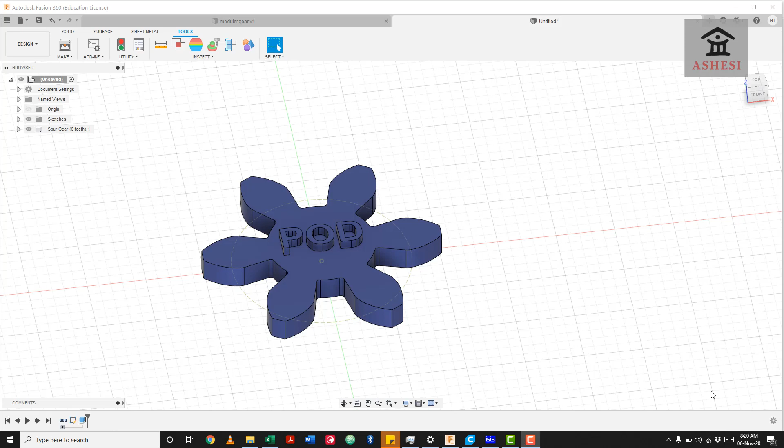Hi everyone, in this tutorial we are going to learn about 3D printing. Over the past few weeks we've been able to learn how to model different items, and then we've also learned how to create assemblies. In this final tutorial I'll show you how you can actually make it and use it for something useful. To help me do that, I'll show you how you can 3D print this spur gear with the Principles of Design logo embossed on it.

I'll be showing you how the 3D printer works, and then I'll also show you the various procedures you go through to prepare this model for 3D printing. Let's get to work.

Let us begin by understanding what 3D printing means. So a 3D printer is basically a machine that has three motors, and the three motors are able to move on the x-axis, y-axis, z-axis. And when it is doing that, it keeps adding a molten plastic material depending on the shape that you program it to print.

So take, for example, this spur gear with the logo on it. If we want to 3D print it, we'll start with a blank bed, and we'll start depositing material from the blank bed, and then it will keep rising up till it gets to this level.

So 3D printing is a type of manufacturing called additive manufacturing. Now the difference between additive and subtractive manufacturing is, with additive, you start adding till you are done with whatever you are manufacturing. But with subtractive, you have a piece of material, and then you take material away from the stock material till you are done manufacturing.

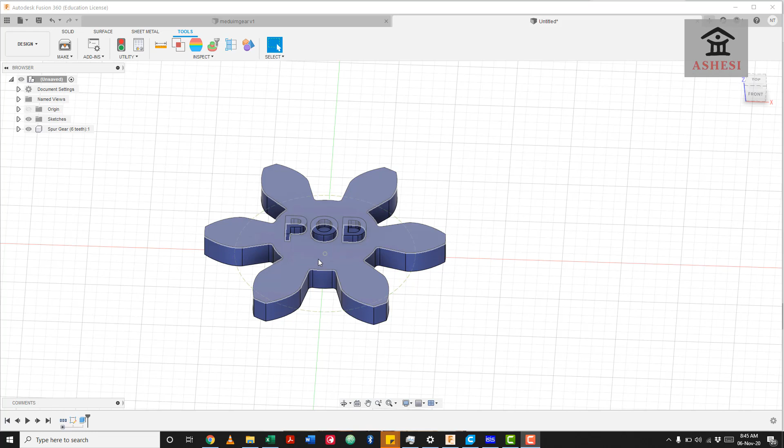So when we compare 3D printing with carving wood, you need a big piece of wood first before you cut some parts of it till you are done with the preferred shape of carving that you want. But with 3D printing, you start with a blank flat surface and you keep adding molten plastic material till you get this. There are various types of 3D printers on the market.

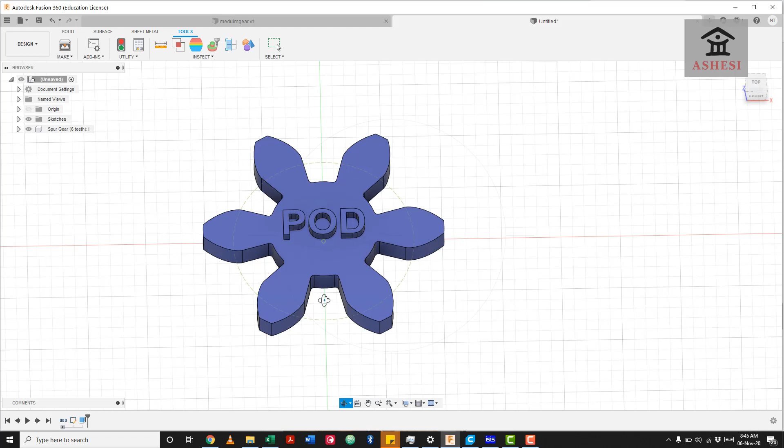Most of them depend on the brand or manufacturer that makes them. Very popular ones include the Prusa i3, we have the MakerBot, we have the Creality.

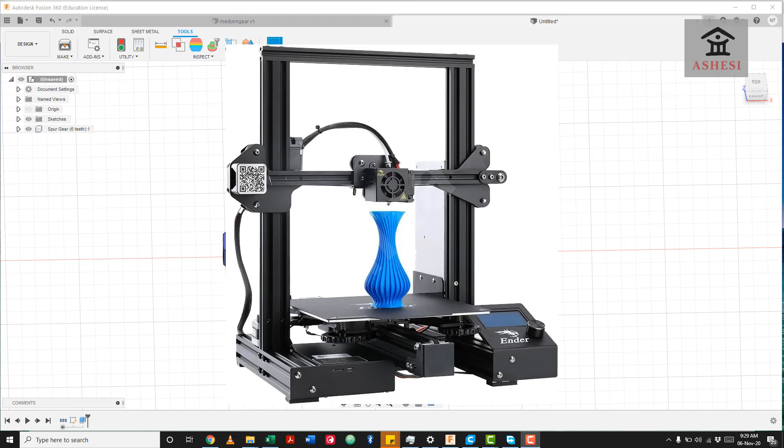Now, there are a whole lot of 3D printers on the market. Some of these include the Ultimaker, the MakerBot, the Prusa, Creality Ender, etc. The 3D printer I'll be using for this tutorial is the Creality Ender 3 Pro. It's a personal printer I use at home for making stuff.

Now, the 3D printer does not understand whatever you are doing in Fusion 360. The 3D printer only has three motors: the x-axis motor, y-axis motor, and the z-axis motor. So we need to prepare this model into a format that the 3D printer can understand, in the format, let's say, move left motor, move right motor, move Z motor.

To do that, we are going to click on Make, and then we select 3D Print. And then over here, you see a small dialog box opening up. You can change the refinement to how you want it. And then you need to select the body that you want to 3D print. So I've selected this body.

Now I can either choose to send it to software that will help me convert this to motor movements, some of which include Mesh Mixer, Cura, Preform, Print Studio, etc. Or I can export it to a format that I already know, and then I will open the software independently and do that. I choose the latter option.

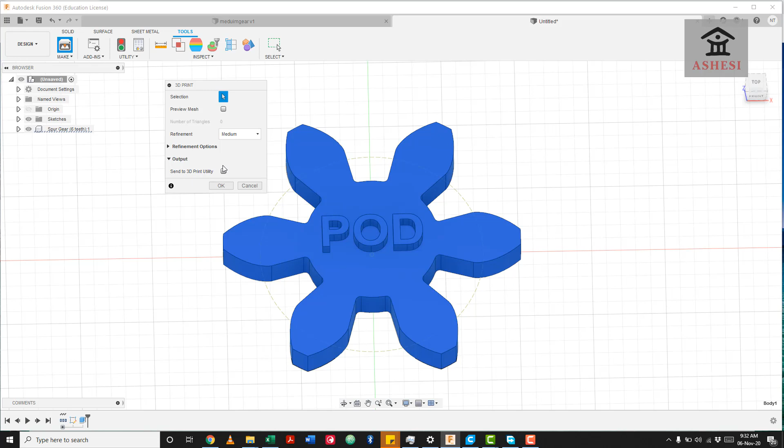So I will not send to the 3D print utility. I will untick this and then I'll press OK. When I do this, Fusion 360 will help me save this file into a format known as an STL file. So I'll change this to gear to print, and then I'll click on Save.

The next software I'll be using to convert this into motor movements is called Cura. And what Cura does is known as slicing. So it will take this model, convert it into XYZ motor movements, and that process is known as slicing.

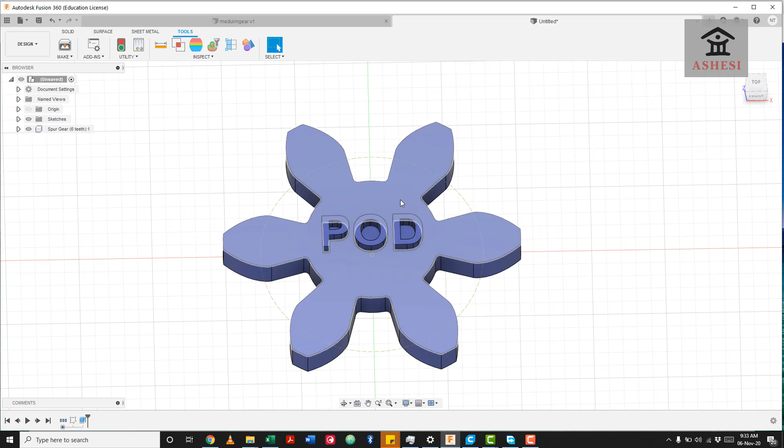So you can download Cura from the internet. Just search for Ultimaker Cura. Let me now show you the interface of Cura.

The first icon here is where you can click to open the file that you want to print. So I'll click on it and then I'll select gear to print. The next thing here is the printer that you are using. I have had other 3D printers before, but at the moment I am using Creality Ender 3 Pro.

And then the nozzle size is the size of the nozzle or the extruder that you are going to use. And the material that you are going to use, which is the filament, is called PLA. We have various types of filaments that you can use, like PLA, ABS, and various others. You can Google that and see.

And then the next thing here is where we can modify the print quality. So we can set the layer height of each print to these various values. It can range from 0.12 millimeters to 0.2 up to 0.28. I'll be using 0.2 for this printing.

And the infill, which I'll explain later, is how hollow or how solid the inside of your print should be. So when you take this model, inside can be hollow and the outside will look solid. You can change this to 100 if you want the material to be solid, or you can change it to something lower if you want the inside to be hollow. When it is solid, it is very durable but takes a longer time to print. And if it is hollow, it's not very strong, but it takes less time to print. So this adjustment is a trade-off between quality of print and the time it will take.

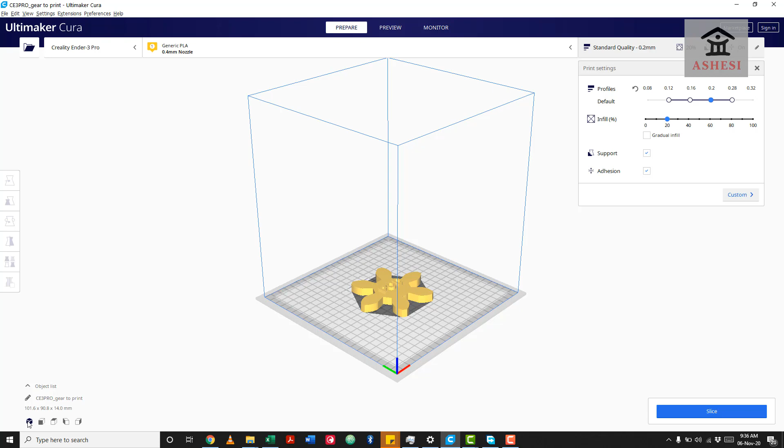So these are the settings I have chosen. Now, under here you have this option called the slice. The slice simply helps you to convert this to motor movements. And then you can navigate around the 3D interface of Cura using this. So this is kind of like the view cube of Cura.

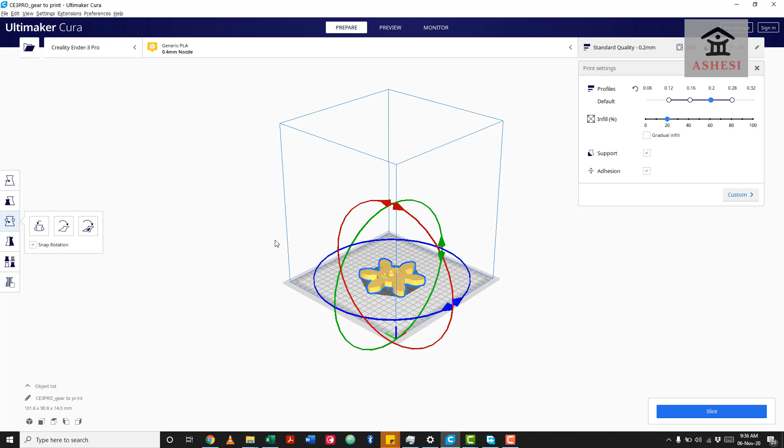The next options I have here can be used to modify the model. The first one here can be used to move the model in the various axes. The second one here can be used to scale the model if it is too big or too small. The third one here can be used to rotate the model. And then you can also mirror your model using this particular option. And you can also use this one to... I don't know.

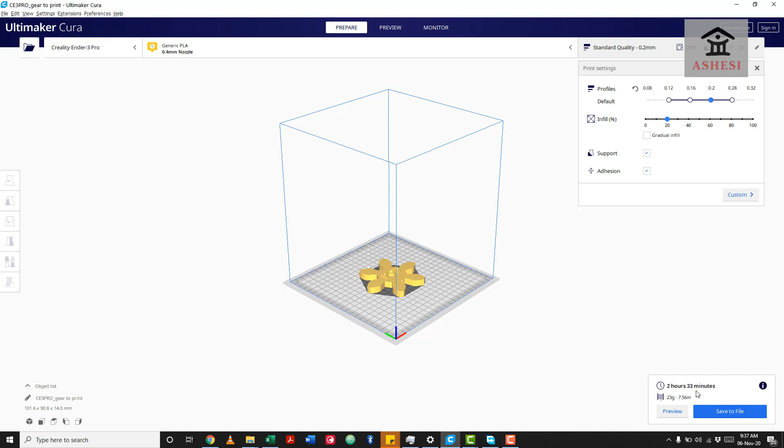All right, so I'm going to slice this. I'll click on the slice icon here. And then it tells me that it will take 2 hours, 33 minutes to print, which is too long for me. So what I'll do is scale this down to a smaller version to reduce the time it takes to print.

So I'll choose this guy, and then I'll change it to 60% of its current size. You notice that it becomes smaller, and the slice time changes. So I click on slice again, and I'll get 50 minutes of print time, which is quite good for me.

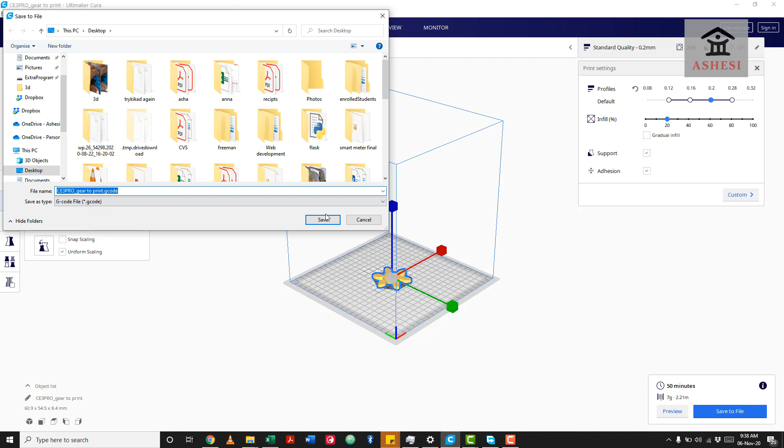So the next thing I'll do is take an SD card and slot it into my machine, then save the model to it. You notice that it generates something we call G-code. G-code is a standard for specifying motor movements in engineering. So I'll save it to my SD card, and then I can take it to the 3D printer.

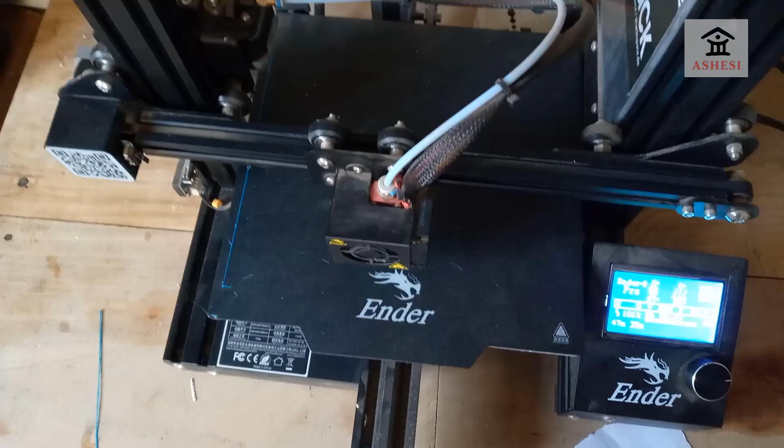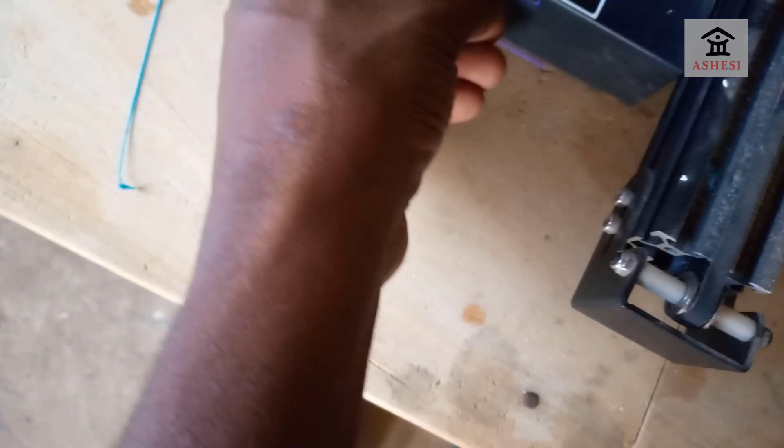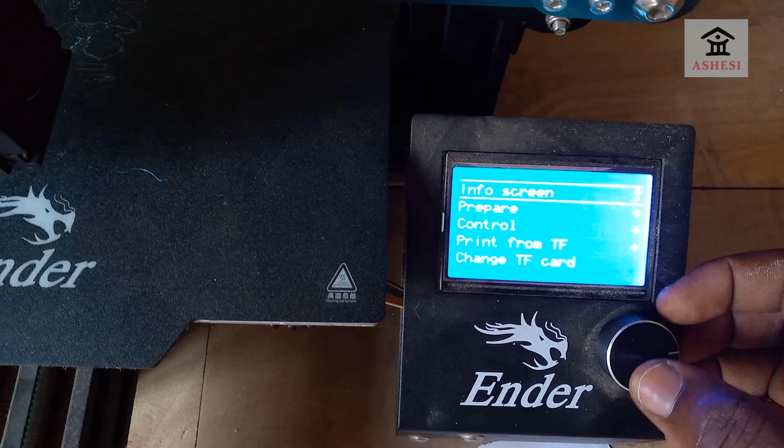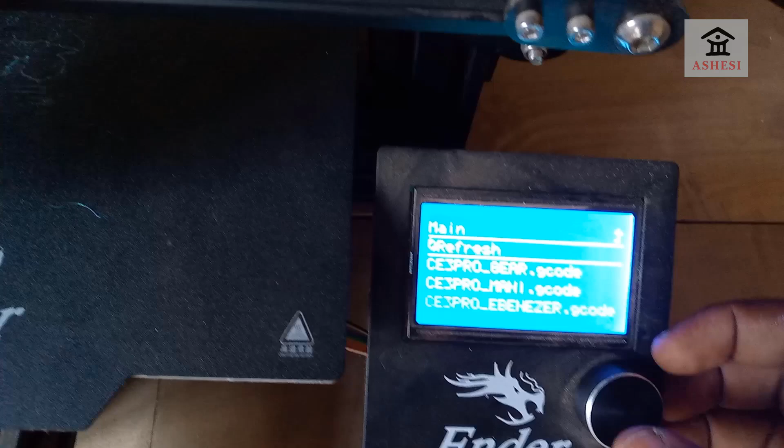The next thing I will do is take the SD card from my computer and insert it into the card slot of my 3D printer like this. After that, I'll go to the navigation panel over here, click on the rotary encoder here, and select print from TF. After that, I'll press refresh, and select the file that I have saved from my computer.

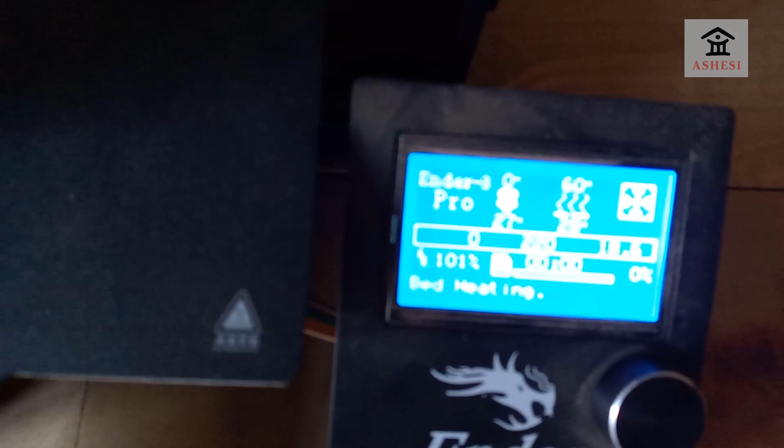We will need to wait for some time for the bed of the 3D printer to heat up, as well as the extruder. So whilst it is heating up, warming up, let me take my time to explain the various parts of the 3D printer.

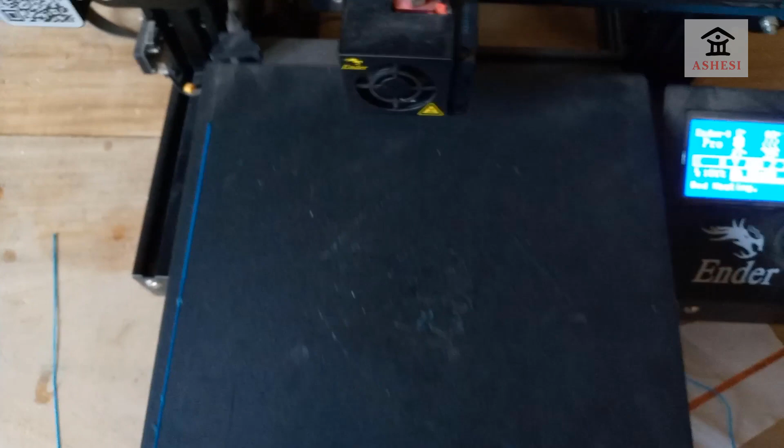The first part here is the bed. This is the bed. The bed is where whatever you want to print will be located. So this is the bed. The bed can move forward and backward, and the forward and backward movement is the y-axis.

The next part is the extruder. You notice there is some copper-like metal underneath. You are not able to see it.

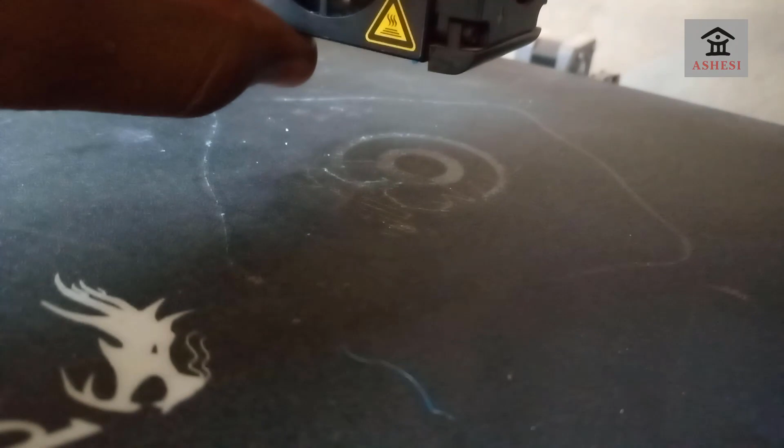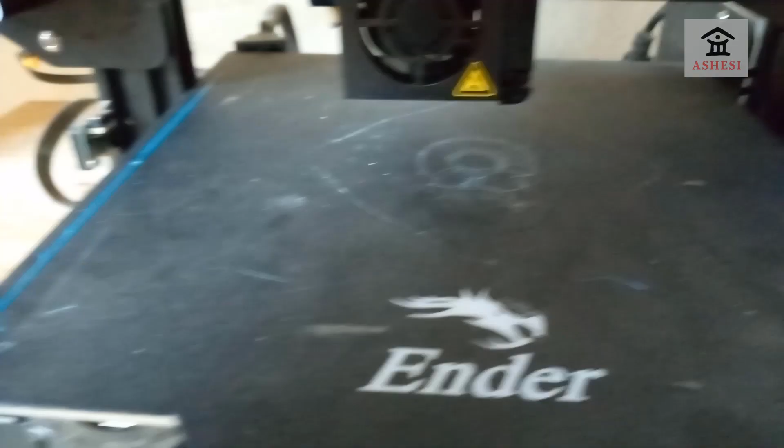This copper metal under the machine heats up to about 200 degrees Celsius. This plastic filament, which is on this spool, passes through here, and when it gets to the end of the extruder, it melts it and then deposits it whilst the machine is moving.

You'll see that shortly. Now, this 3D printer understands only motor movements. It has 3 motors, and those motors move the machine on the various axes.

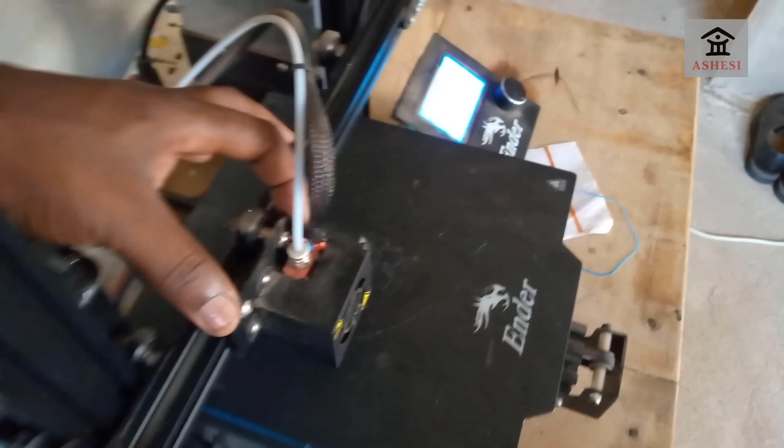The first motor is this one. This motor is responsible for the X axis movement, which is the same as the left and right movement. There is another motor down here, attached to this threaded rod, which is responsible for moving the machine up and down. I tried doing it for you to see.

The next motor is this one. This is responsible for moving the bed forward and backward, forward and backward.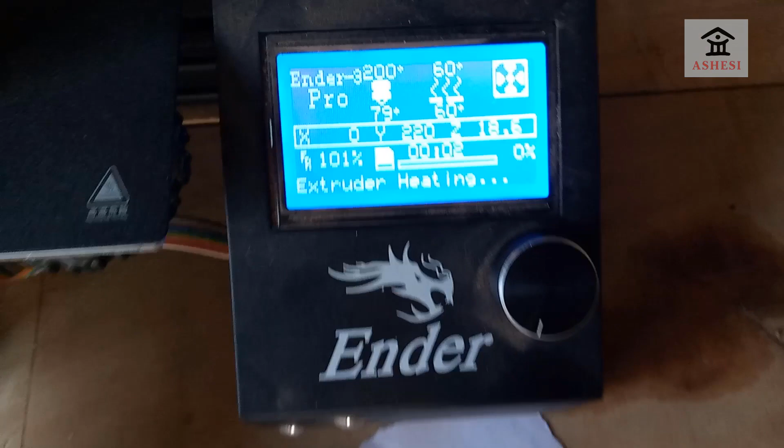This is the power supply, and this is where you turn it on. And this is the screen, where you can control the various parameters.

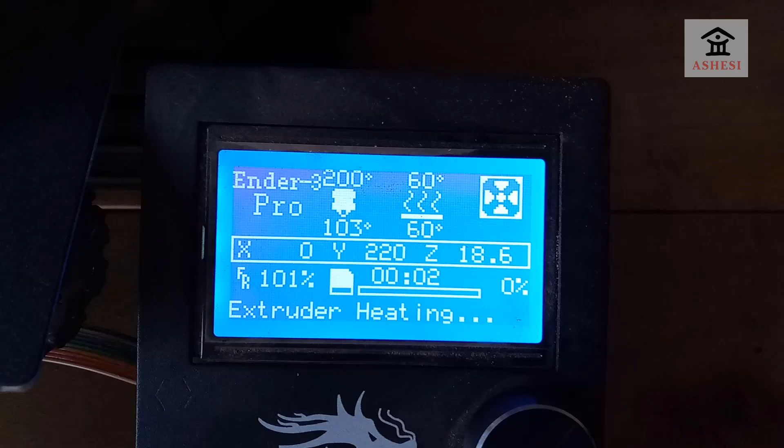At the moment, the bed has warmed up to 60 degrees, and the extruder is now heating up. It needs to go all the way to 200 degrees Celsius before the printing can start. So let's wait for it to do that.

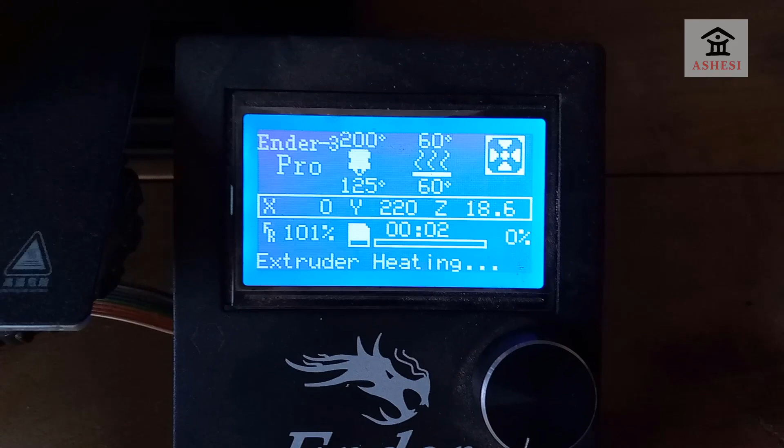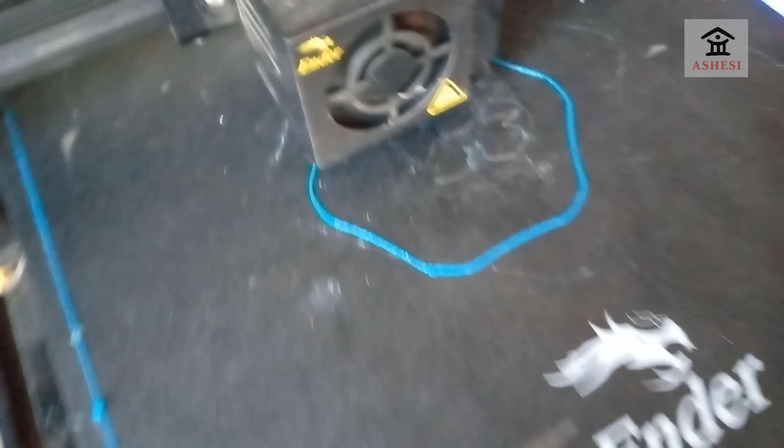So our print has started. It will first print this layer, which is called the adhesion layer. After that, it will start printing the actual gear. Let's see how it does that.

Great, so you can see the outline of the gear showing partially.

It will continue doing this for the next 46 minutes until it is done depositing this plastic all over the outline that we have created for it.

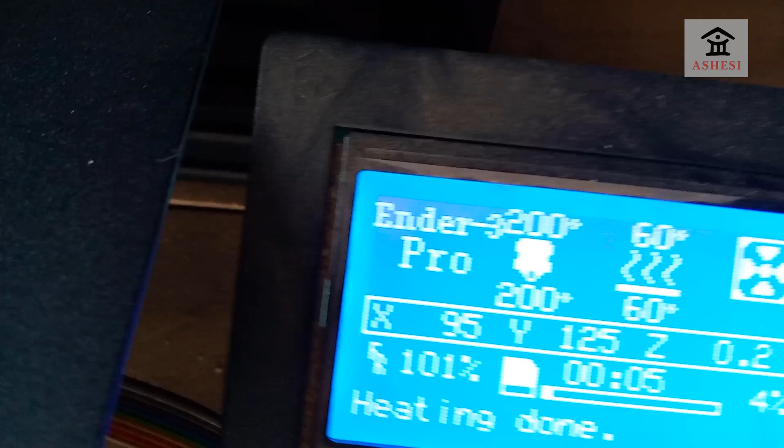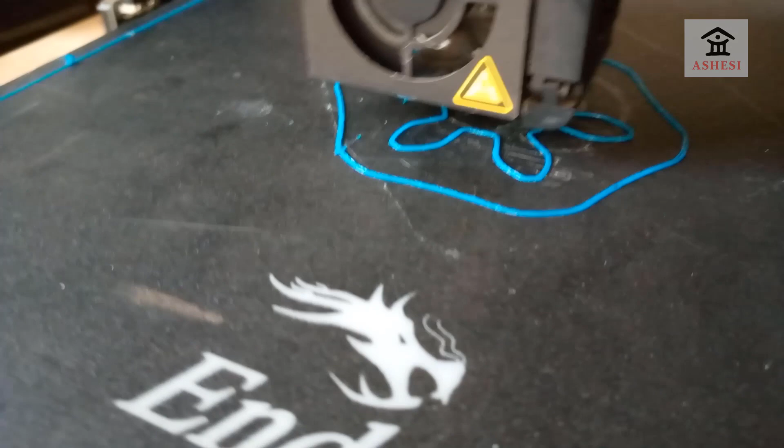One thing you should note is every layer of plastic that it deposits is 0.2 millimeters thick. It will keep cross-hatching like that till it is done printing, and then it will add another 0.2 millimeters to the layer height.

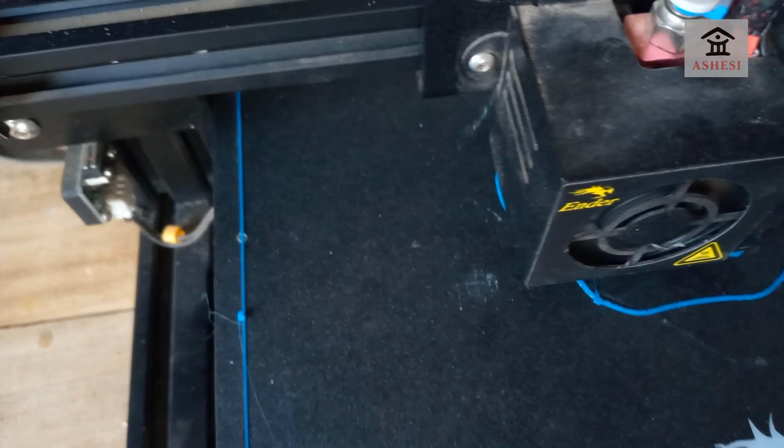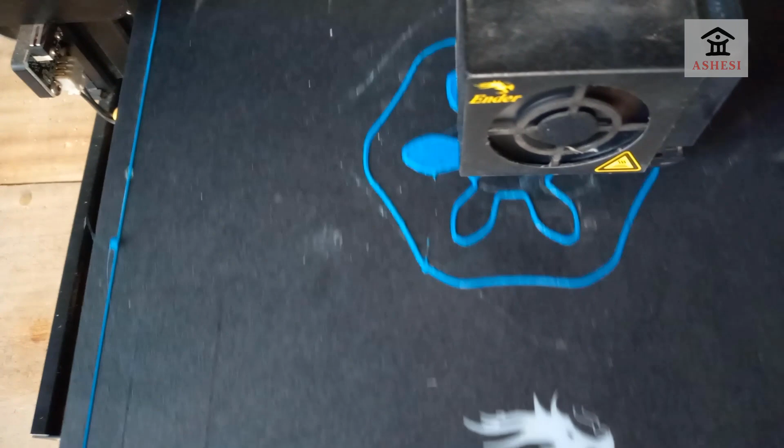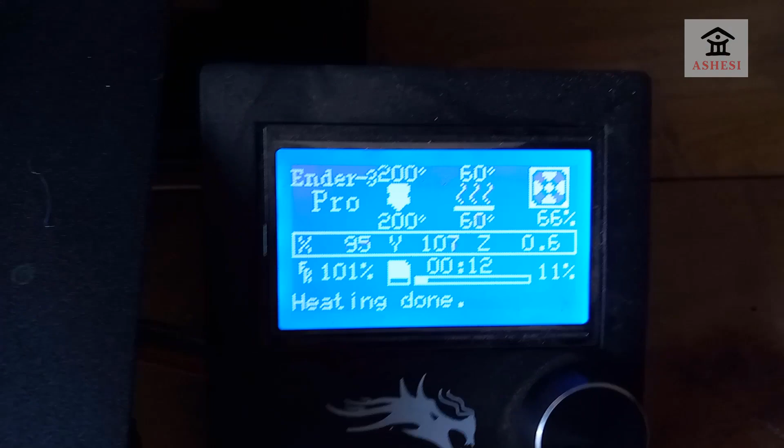So you can see what it is doing now. Our job is now 11% done, and this is where we have gotten to.

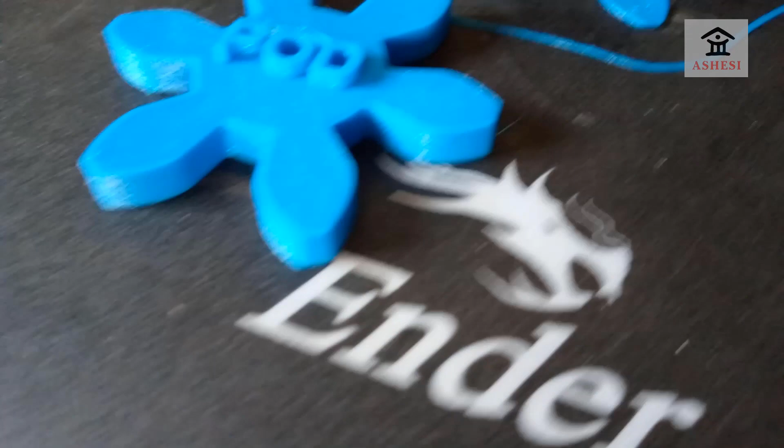It will continue doing this till it is high, it is big like this, and then it will have the principles of design printed right on top of the gear.

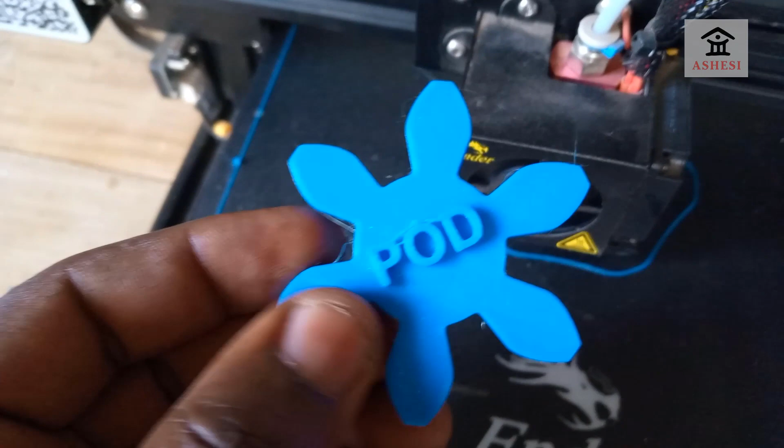It will continue doing that till it becomes like this, and then I can just peel it off like the way I did earlier.

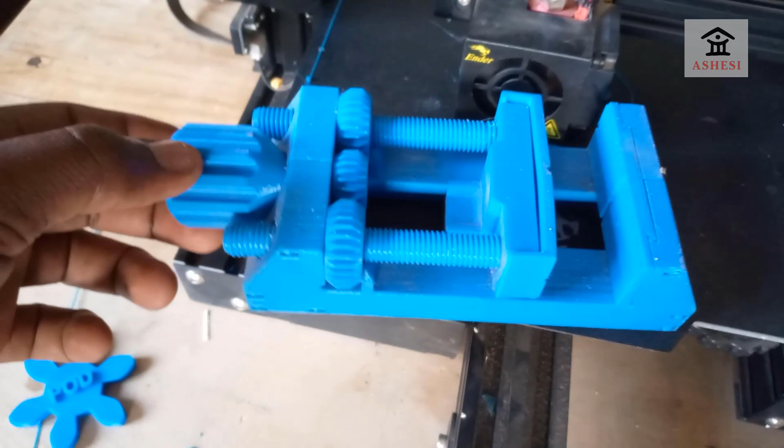I use this 3D printer to make this clamp. During the lockdown I needed a clamp at home and wasn't able to go to campus, so I just printed one and used it to clamp things at home. It works perfectly well.

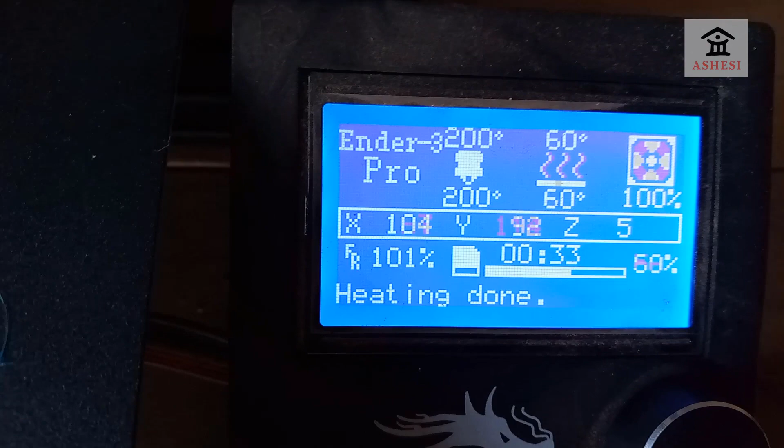Our job is now at 60% and the layer height is now 5 mm, and this is the result.

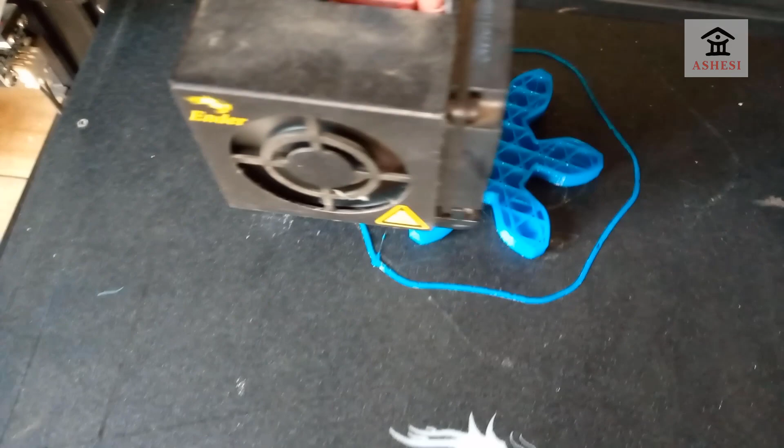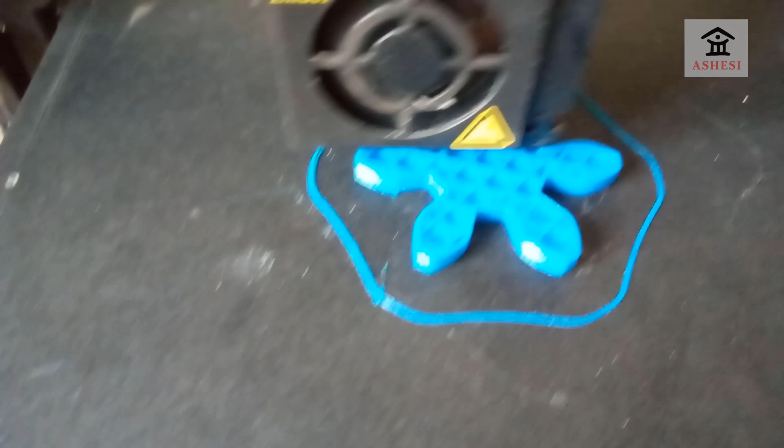You'll notice that the gear is not a very solid gear. It has this cross hatch in the center of it. The cross hatch helps the printer print the gear for us very quickly. This cross hatch is called infill.

When you make the infill 100%, there will be no cross hatch, but when you make it a percentage lower than 100%, the inside of whatever you are printing will be hollow. So this thing I'm holding here is hollow inside, but you won't notice it until you cut a cross section of it.

So this is what the printer does before it covers it up nicely and prints the POD on top.

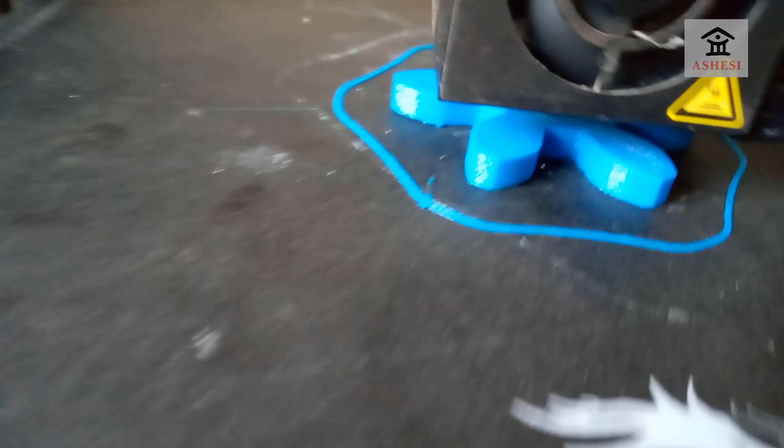Our job is now at 83%. Layer height is now 6.8 millimeters, and it is now putting the POD, principles of design, embossment onto it.

So it is now done with the main stock gear and has covered it up nicely, and it is now putting the principles of design on top of it. We have roughly 3 minutes more and we are done.

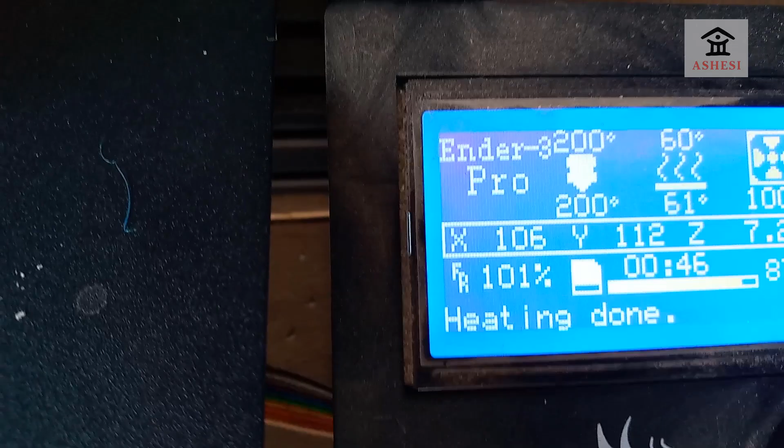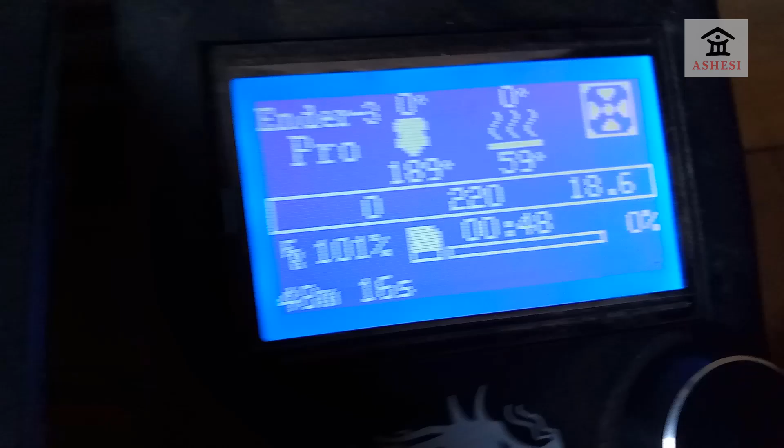So it is now done printing, and this is the result. The final layer height is 18.6 millimeters, and the machine has now moved to the home position, and I'm now coming to peel this off.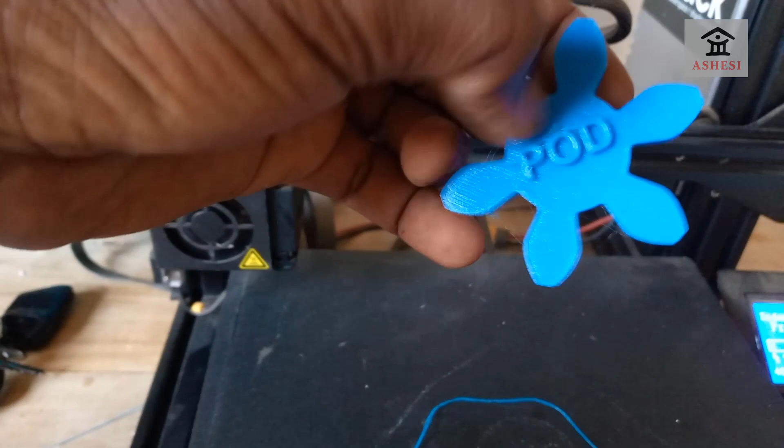So this is the result of the 3D printing that we have done. It's an actual piece of plastic, and it is very hard and you can actually use it. I have 2 of these gears which are printed, and this is what you were actually trying to do the other day with the assembly.